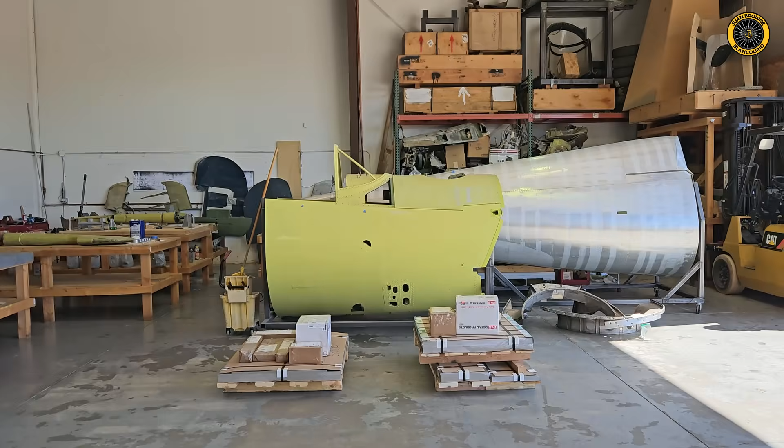We're back here in Cameron Park getting an update at Chuck Wahl's Vulture's Row Aviation on the Corsair build. Not only this rare birdcage Corsair, but several other Corsair restorations are going on simultaneously. Let's check it out. Right now he's working on about 7 different Corsair aircraft here in the shop today.

Well, it's been a while. Let's get an update on Chuck's birdcage Corsair. He's working on this a little bit on his own while the employees are working on restorations for other customers.

We'll start with the R2800 Pratt & Whitney radial engine, the Dash 8 model. This is one of the very early models of the 2800, and apparently the 2800 was first tested in the Corsair. A 2 or 3 stage blower back here.

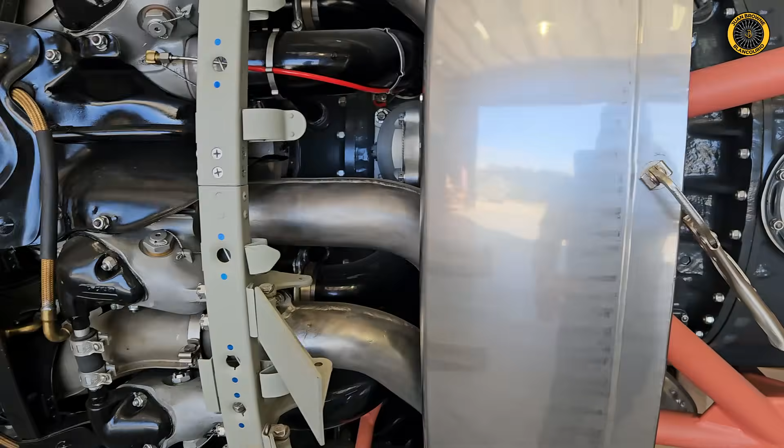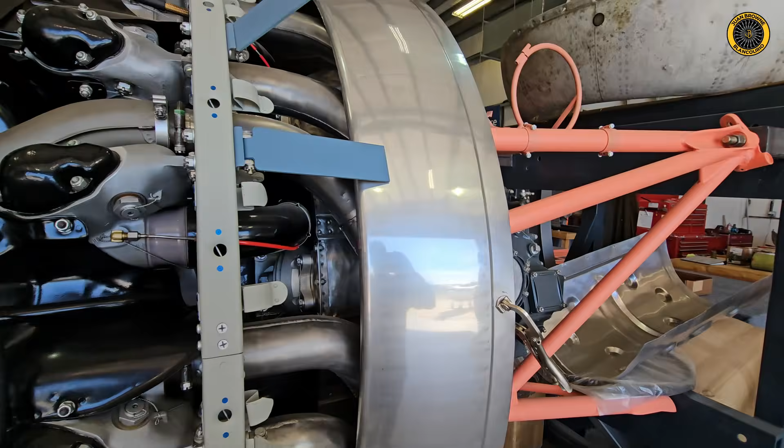Neutral, low, and high. The engine cowlings that we looked at are going to mount here. Cowl flaps are going to mount here. Here's the backside of your exhaust shroud, stainless steel. Fortunately, this is original, and then this piece is hand formed new to create the exhaust shroud.

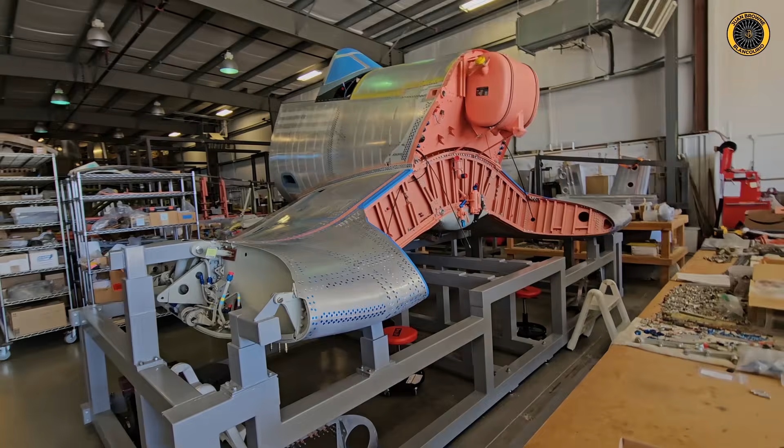Here we're looking at the firewall forward of the birdcage with an original 20-gallon oil tank for the birdcage Corsair. Of course, the brand new center section and spar, and here's where a whole lot of additional plumbing is going to have to take place for both fuel and oil, plus all the coolers and doors and everything else associated with that. Now the fuselage center section has had a lot more work done to it since last time we reported on this.

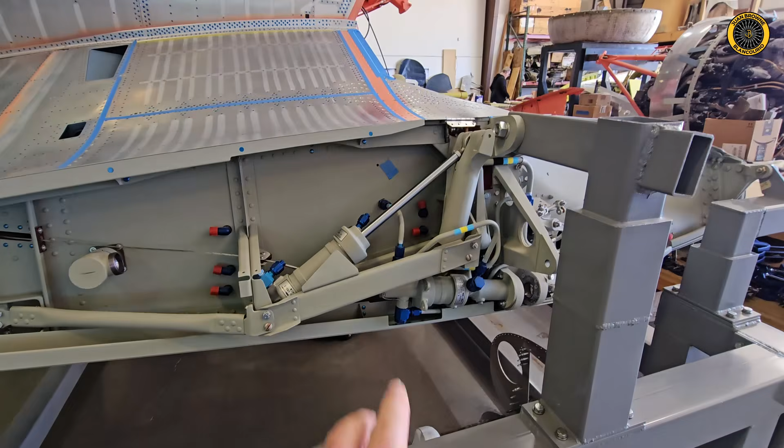He's getting all the plumbing in here for fuel. The fuel is done. Hey, there's that fuel piece we were talking about. And the hydraulics are getting done. And remember, it's going to be, of course, a folding wing hydraulic design. All the flaps have been mounted.

These flaps alone take a couple of years to build, like 22 of these individual flap panels. We'll come back and take a closer look at this here in a moment. But here's the tail section that's going to be bolted on to here.

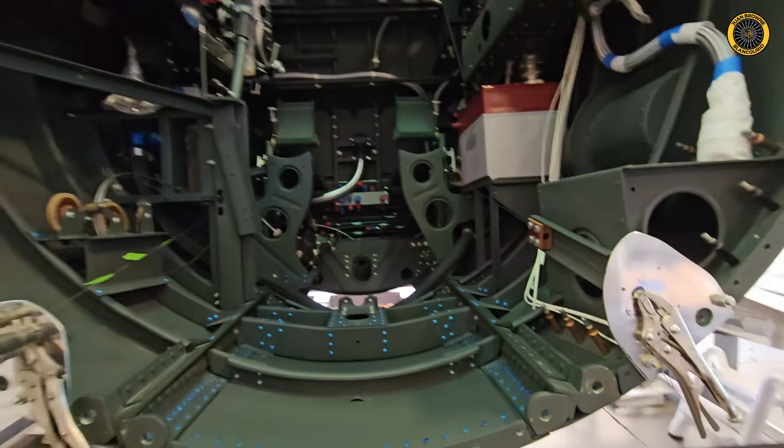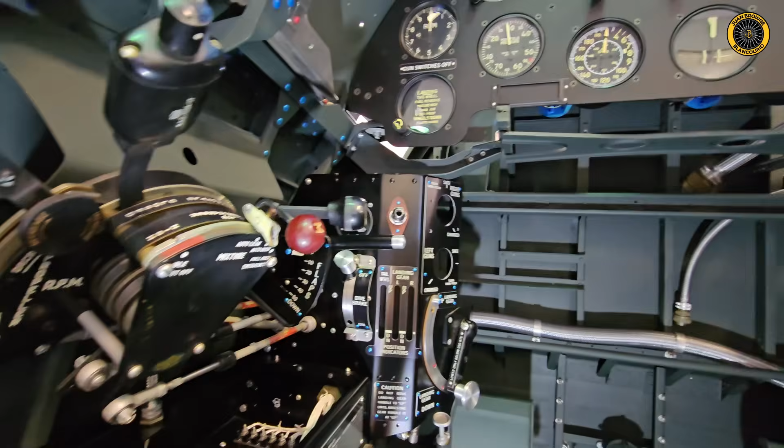Chuck's adding all the detail to the original looking cockpit interior here. There's your instrument panel. A lot of your different crazy controls as part of the Corsair. Looks like landing gear, dive brakes, throttle quadrant, flaps, trims, elevator, rudder, ailerons, bomb release.

What else have we got here? Emergency gear extension. Hydraulic pressure, fuel, amps, G meter, electrical panel here.

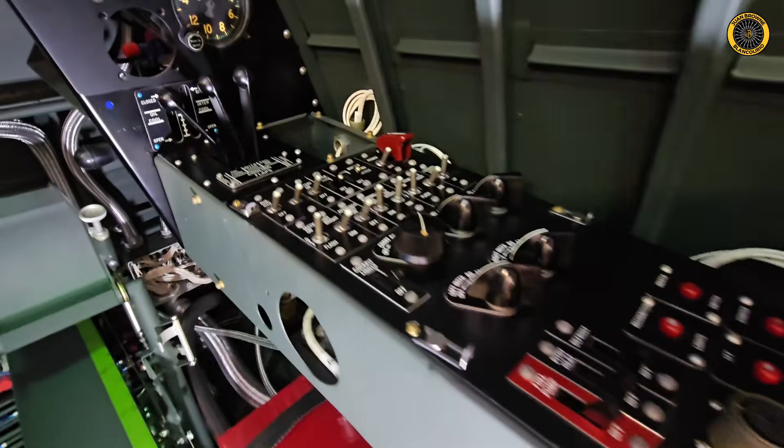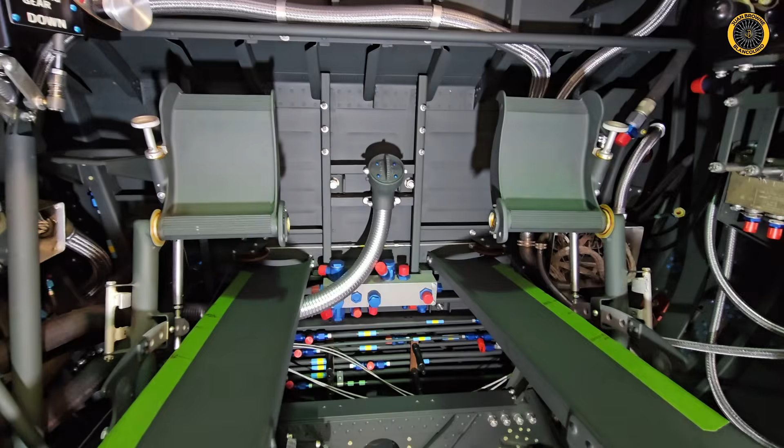All of the details going into this restoration. Of course, the rudder pedals, air vent, and look at the hydraulic lines all properly marked. Here's your fuel selector valve and handle, chain to drive all that. Just an incredible amount of detail.

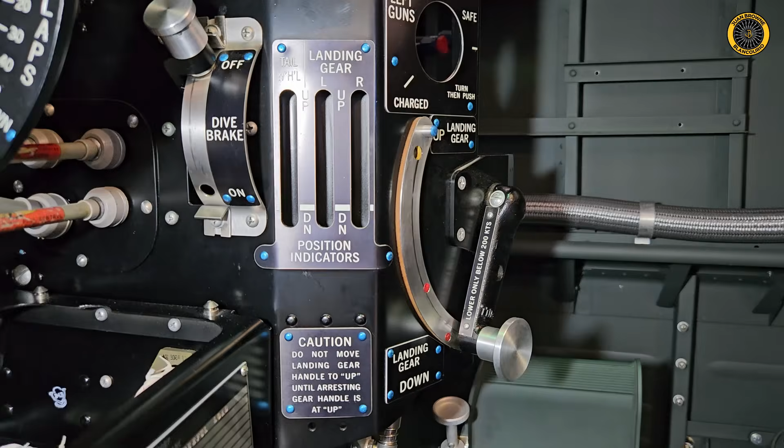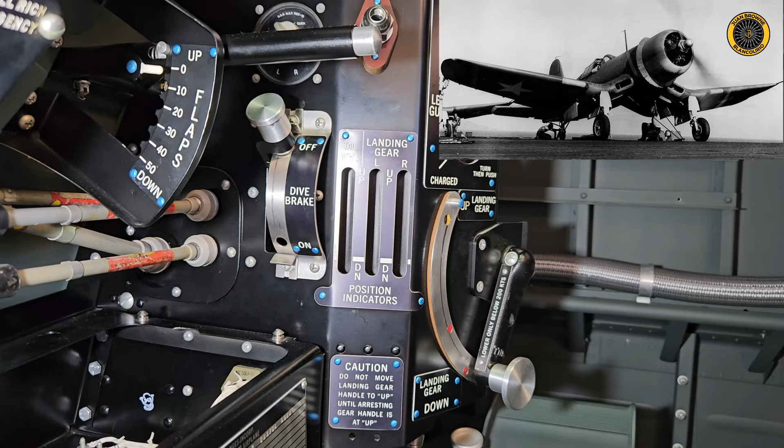Here's a fascinating bit of trivia about the Corsair. You see the landing gear down lever and the placarded 200 knot limit on the landing gear, and then the separate dive brake controls. And we've talked about this before. Remember, on the Corsair, it's the panels on the front of the landing gear legs which are your dive brakes. In other words, your main landing gear are your dive brakes, but there was a limit on the tail wheel, and that's that 200 knot limit on the tail wheel.

So if you need to get out of a scrap in a hurry, or you need to dive bomb as vertically as you can, you would lower the dive brakes, which would extend the main gear only. And when you come into land, of course, you lower the landing gear using the landing gear lever, which lowers the main gear and the tail wheel. So because of that tail wheel speed limit, they had to have a separate dive brake control for the main gear / dive brakes. And check out that airspeed indicator.

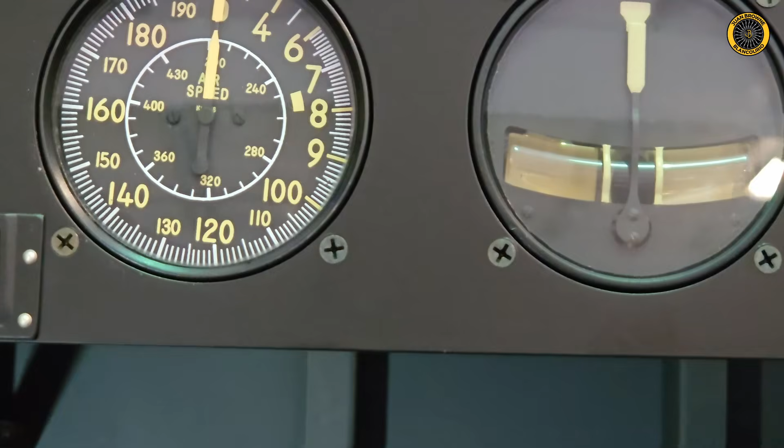It goes twice around in knots. Looks like the first dial winds it up to 200 miles an hour, or correction, 200 knots, and then it wraps all the way up to 430 knots.

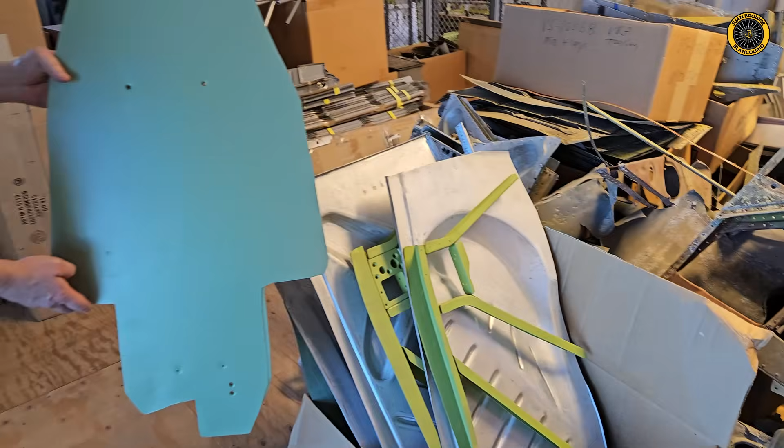Here's the dive brake portion of the landing gear we were talking about. The landing gear would be down here, and this big panel here would be your dive brake, bolted right on to the landing gear, main landing gear leg. And there's some additional gear door parts down there. Dive brakes. Landing gear and wheels, some assembly required.

Now let's get underneath the center section of the Birdcage Corsair into the right-hand landing gear wheel well, and look at the incredible detail going into this. All of the hydraulic lines, fuel lines, electrical cabling, all coming into play now.

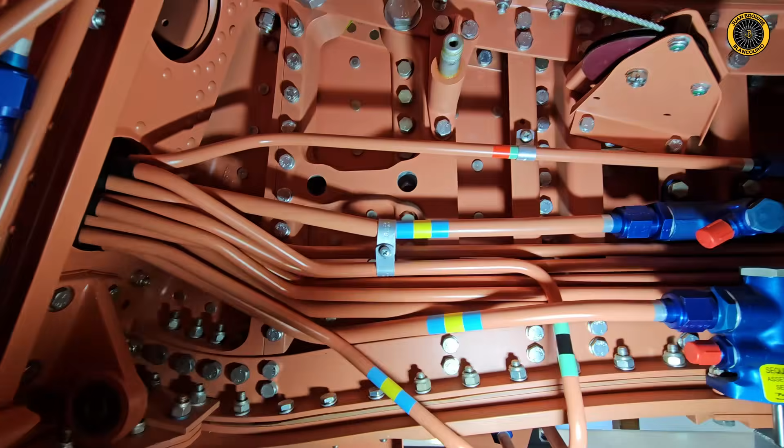See how the hydraulic lines are color-coded? Sequencer valves for the landing gear, and of course your brand new spar running right through there, part of your center section, kind of looking at the back side of it. And look at even down to the wiring with the original markings on the wiring. Just an incredible level of detail.

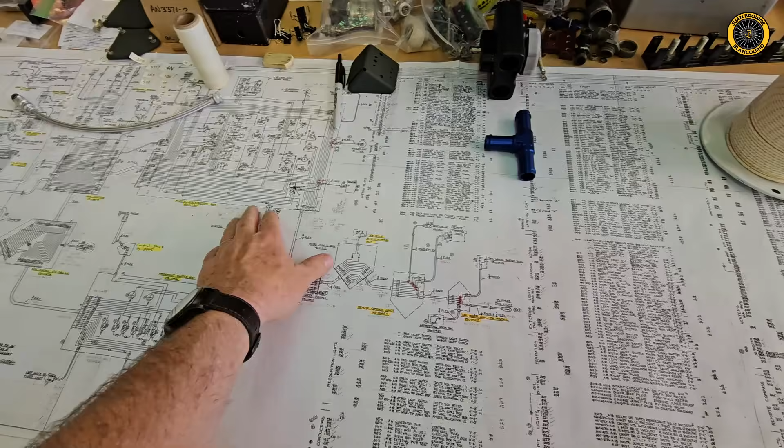We were talking about the wiring down below there. Here's the original wiring, 80-year-old or plus wiring for the Corsair, and here's the new wiring which matches the original, but check out the drawing here. So to get your wiring to match the original schematic so you can troubleshoot it, you got to label each individual wire, and Chance Vought would just put a bit of this tape or this marker at each end, the termination end of each wire, to indicate what number wire it was and where it was on the schematic, as opposed to North American, which would mark the wires every so many inches with a number. So get your magnifying glass out and start wiring your Corsair.

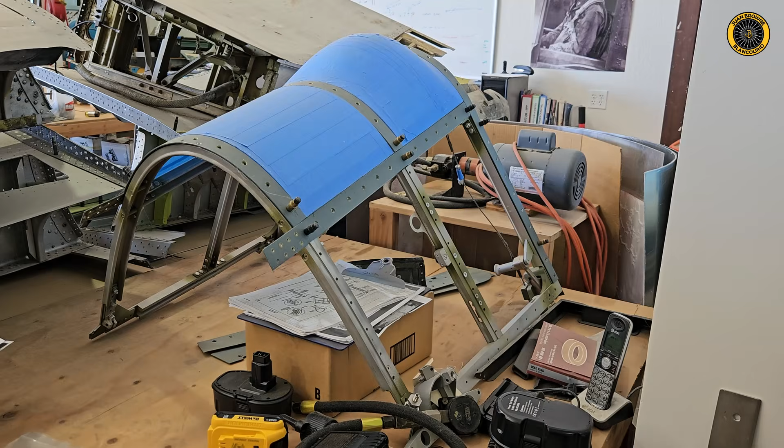And here's the canopy that gives the aircraft the namesake Birdcage Corsair. It's this birdcage style canopy of the early model Corsairs. They give it its name because, of course, later they came up with the big plexiglass bubble canopy for greater visibility. You've got room up on top there for your head, so you can even change your mind.

Now let's go take a look at some of the other projects going on in the shop.

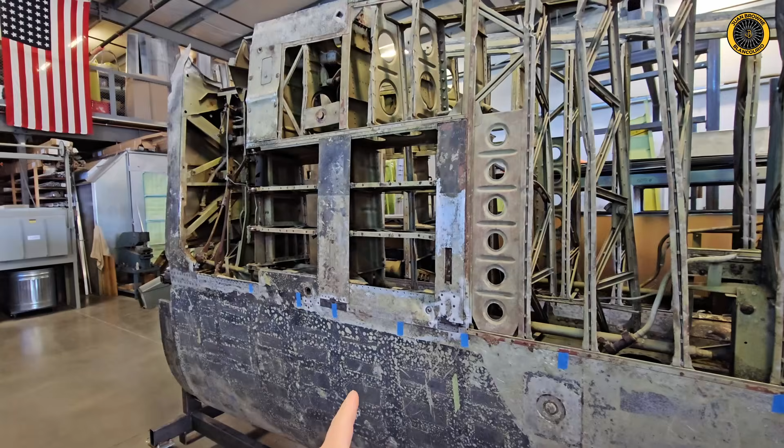Here's a set of wings to be restored fresh from the South Pacific. These are F4U-1 Alphas. As Chuck reminds us, before the 1Ds, these had auxiliary fuel tanks in the wings, and they later went to drop tanks. And remember, part of these wings are fabric covered, and here's the little clips that hold the fabric onto the ribs in lieu of rib stitching.

And these were a whole pile of wings collected out of the South Pacific. So the Corsair out there in the field today, known as Lucky Gallon, these wings are going on Lucky Gallon. I asked Chuck what happened to the wings of Lucky Gallon. Lucky Gallon was the famous racing airplane from back in the Cleveland Air Races, and it was abandoned basically, and the wings were missing. Somebody took off with the wings, so in order to restore the Lucky Gallon, they got to get these wings set up for it.

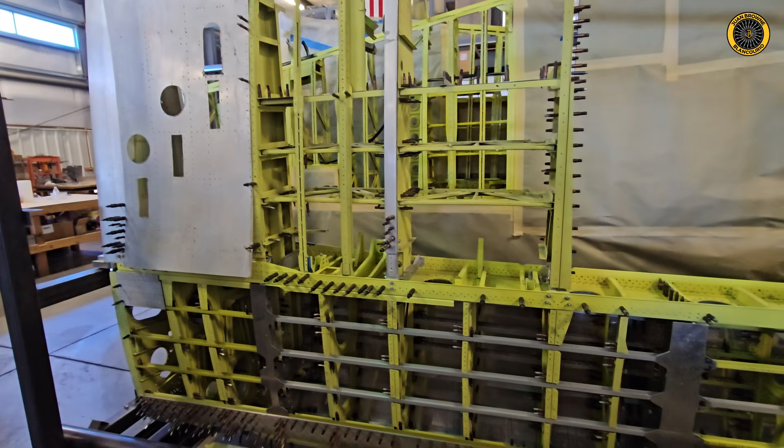Here's a set of wings to a 1D Corsair that are being restored. You can tell the original parts that are chromated and have the original rivet holes in them, and then the new parts going in have not yet been drilled. So parts like this, brand new skins, and a lot of Clecos. Of course, the Clecos is what fastens the parts together temporarily until you get it riveted together.

And here's how you start this whole process. You get the original blueprints by hook or by crook from the Smithsonian or wherever, but you got to start with these original blueprints and then start working from there. And then you get an existing Corsair wing and you build a jig to match that wing. You get one good straight wing, jig that wing, and now you can recreate additional wings from that one good jig, or recreate that jig multiple times over. Same thing with the fuselage and the fuselage jig. But it all starts with a good set of drawings.

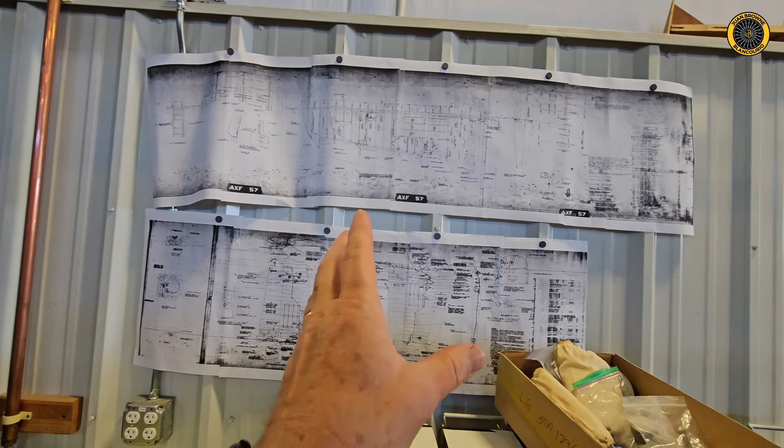Now, it's wartime, and when they're printing these prints up, everything's moving really fast. There's a lot of errors and mistakes on these prints. So in order to do the kind of work they're doing here today, they really need to have an original aircraft, a completed aircraft, and compare the completed aircraft to the notes on the drawings. There is a lot of errors in the wartime drawings. Probably a lot of young kids right out of school, like my dad, working on that too.

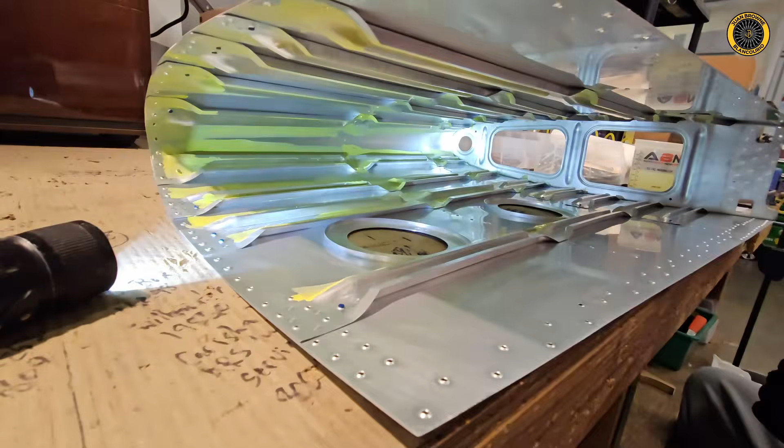Some parts in the paint booth here. It looks like zinc chromate, but it's really epoxy primer. And is that what's getting hand brushed on here too? Yeah, he's brushing on the back side where the spray gun won't go. Oh yeah, got it before it. He sprays everything. Painstaking details.

So here you'll see a combination of yellow epoxy and traditional dark green zinc chromate epoxy. Well, when you open up the ammo cans, you want to see the traditional dark zinc chromate colored epoxy primer in your restoration.

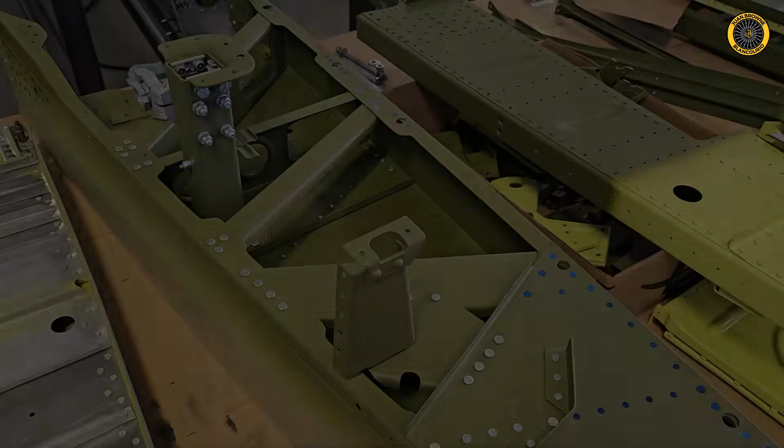Some of the things you find in an old Corsair.

Oh, something happened there.

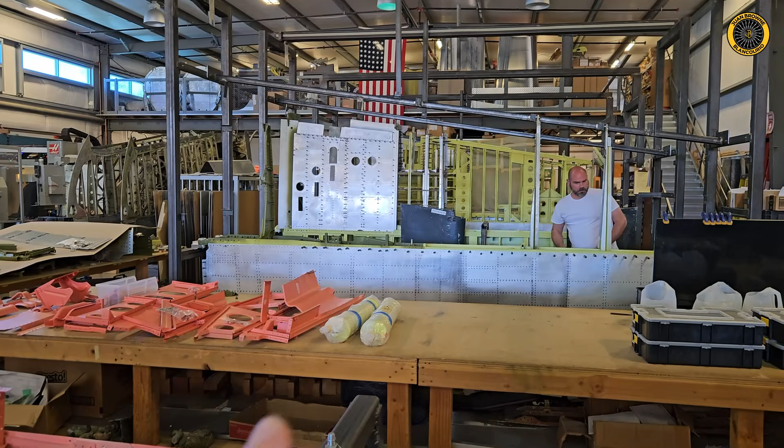Now you see a change in color from the traditional zinc chromate color to this salmon colored primer. When you get into the salmon colored primer, you know you're working with a birdcage Corsair, a really early model. This was the color of the primer for those model of aircraft.

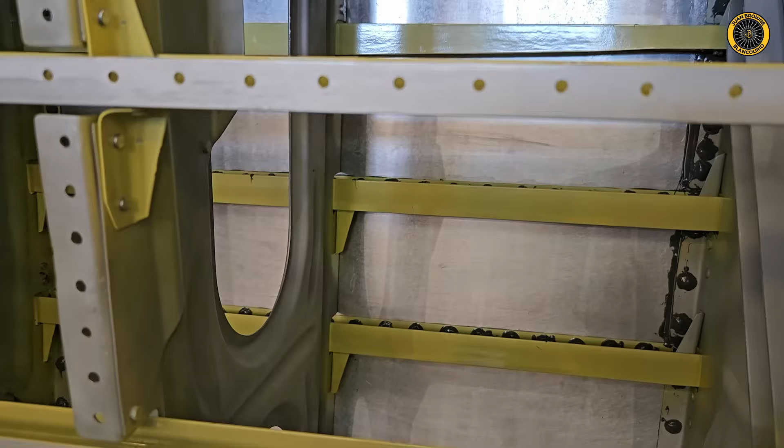The early model Corsairs used wing tanks, or wet wings, and this is the inside of a wet wing of a birdcage Corsair. If you've ever built an RV aircraft before and built your own fuel tanks, you'll be familiar with this Pro Seal.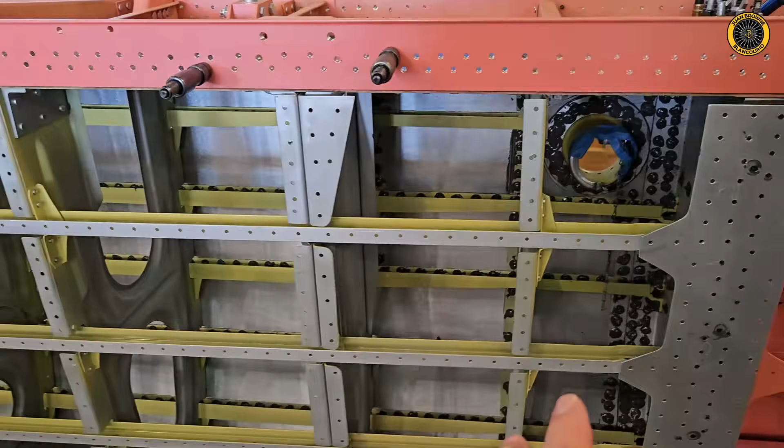You got to rivet each rivet wet with Pro Seal, and that stuff gets all over everything. So the inside of this part of the wing will be filled with about 58 gallons of fuel.

Later model Corsairs, after the 1 Alphas I believe, they began to go to the drop tanks. So they got rid of this complicated wet wing design and just went with the drop tanks.

And each Corsair had a fuselage tank in between the engine and the cockpit.

Because the birdcage Corsair is so rare, a lot of these parts are all brand new manufactured, including these wing spar assemblies.

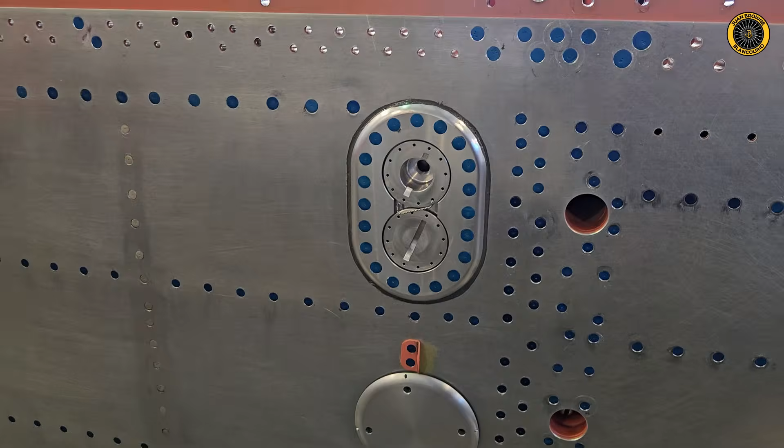Here's the drain sump for a wet wing Corsair on the bottom of the wing, and underneath here is your fuel filler on the top of the wing.

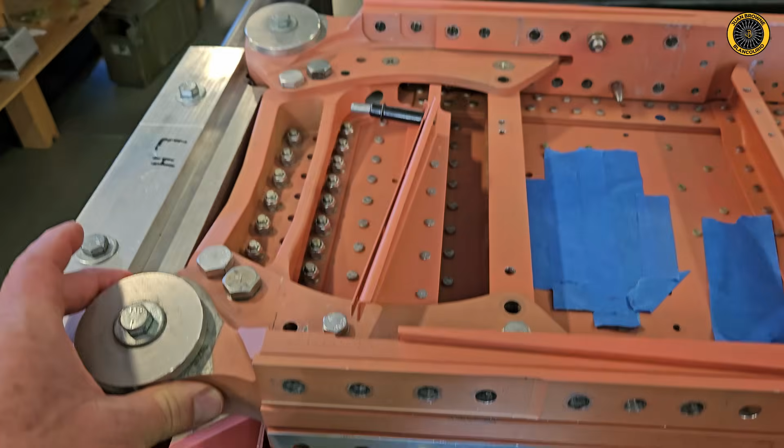And of course the wings on the Corsair fold, so you've got these crazy angles here to create the pivoting outboard portion of the wing.

These are just the bolts that hold it into the wing jig for now. And these brackets here are going to hold the ammo boxes, so you're going to access your ammo bay right here, and that's going to be the top wing skin.

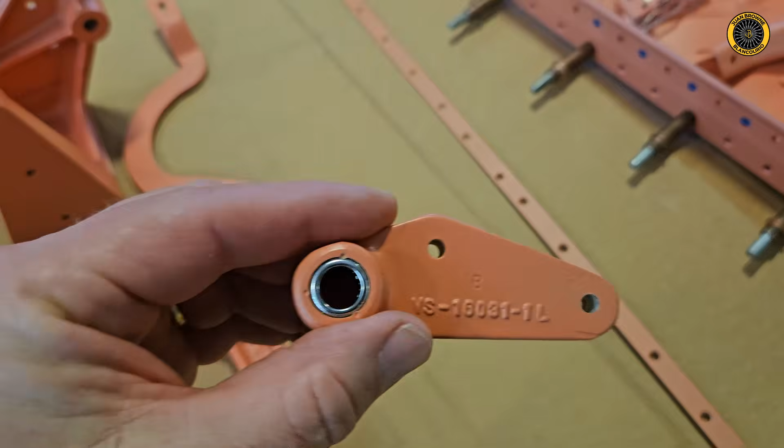A lot of the millions of little brackets and bits are original with the part numbers on there, restored, but a lot of parts you got to make brand new, like these fuel parts here, because the original parts are just not airworthy.

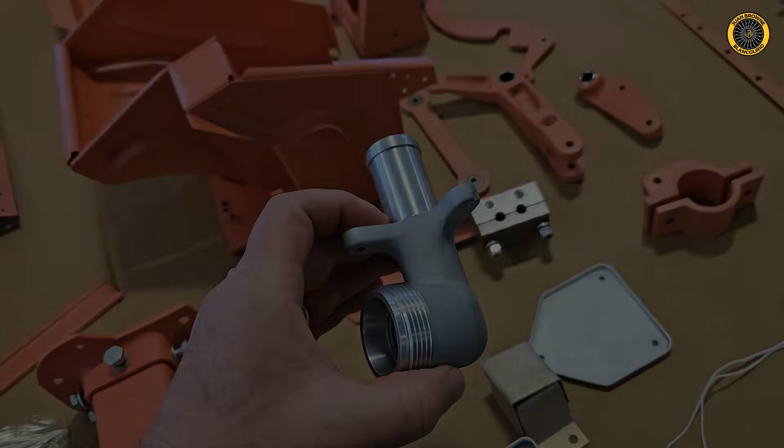Look at this, here's some ammo boxes, and here's some gun barrel blast tubes where the 50 cals would stick out of here. Augmenter tubes for your guns.

This is an accessory cowl door. It kind of works in conjunction with the cowl flap, showing Kellen how that thing drops down. When you shut the engine down, that opens up and helps get cooling air through the aircraft.

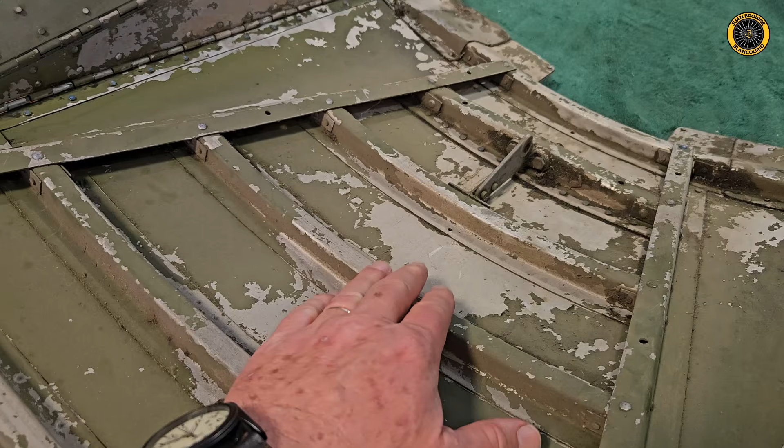But anyways, this is an original part, and from this original part they're going to get the specs. They're going to basically take this thing all apart, get all the dimensions, and put it into SolidWorks.

Then they begin to recreate additional new components for this particular part, so they can build a number of these components, but they got to start with an original piece.

Back that up with the drawings and then feed it into SolidWorks and start spitting out new parts from there, because each one of these is different, and of course it's all got to be spot welded.

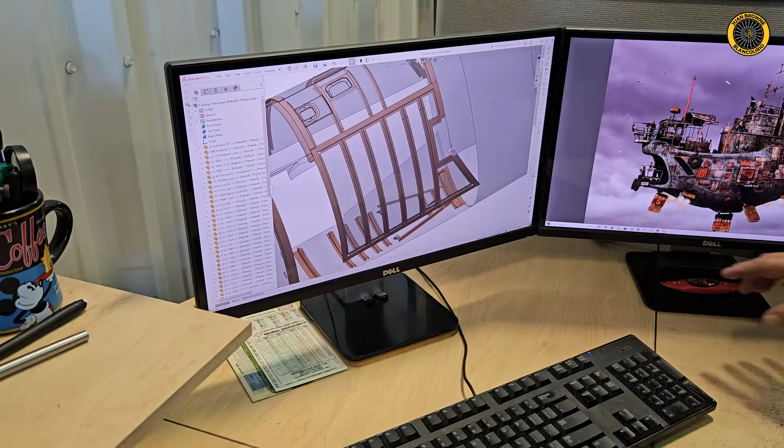So here we are in SolidWorks, and here's what the component looks like when you begin drawing it up. From this, you can begin to build parts with it once you've got the drawings completed.

So here's an individual part off of SolidWorks that he's drawn up. It's going to go into SurfCam, and from SurfCam it creates the code to feed the CNC machine, which can then create the dies, which you can then begin to stamp out the parts from.

Oh okay, there goes the process of stamping your part. Right there, so you've got the male and female mold.

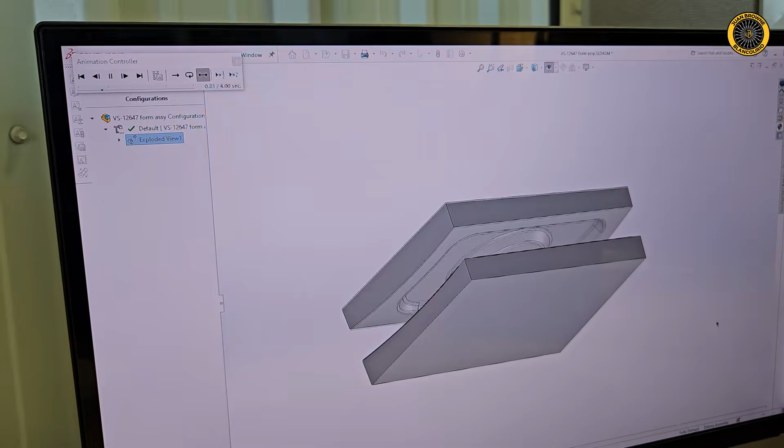And you're machining these molds out of aluminum billet? Yeah, we're not doing hundreds of parts, so it holds up enough for what we're doing.

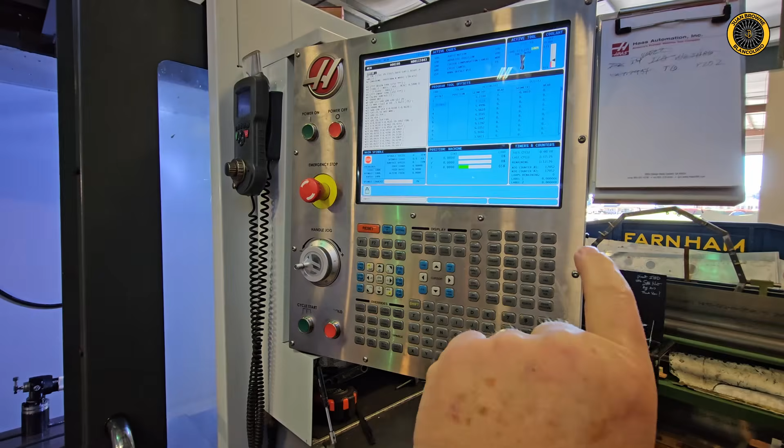Good. And here's your 4-axis CNC machine. You plug the data from your drawings into here, and you can start milling them out by the hundreds.

So as you remember, the Corsair had 50 caliber guns per side, 1,175 rounds, and these are the chutes that fed those rounds. Okay, here's some brand new stainless steel ammo feed chutes feeding the ammo.

They had to start with an original piece, and we're going to show you the jig here in a second.

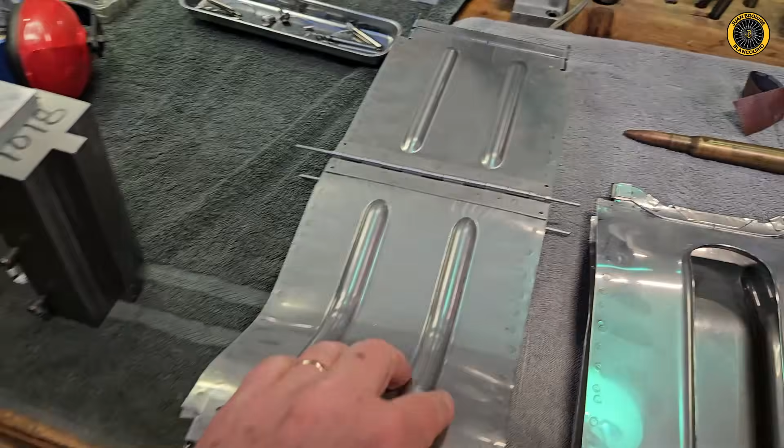So how do you get these shapes? You come over here and you have to build a jig, and if you pop it open, there's the shape that you're looking to achieve right there.

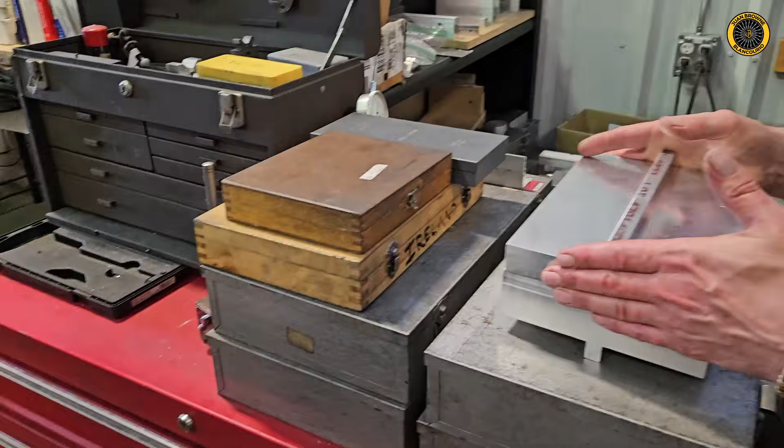Put that in a hydraulic press, smash it down with a few thousand pounds, and you've got your stainless steel part here that is then subsequently spot welded together.

Ammo chutes, stainless steel.

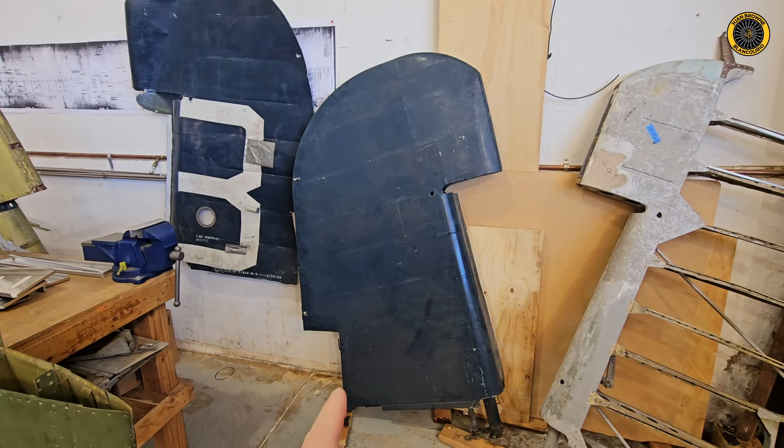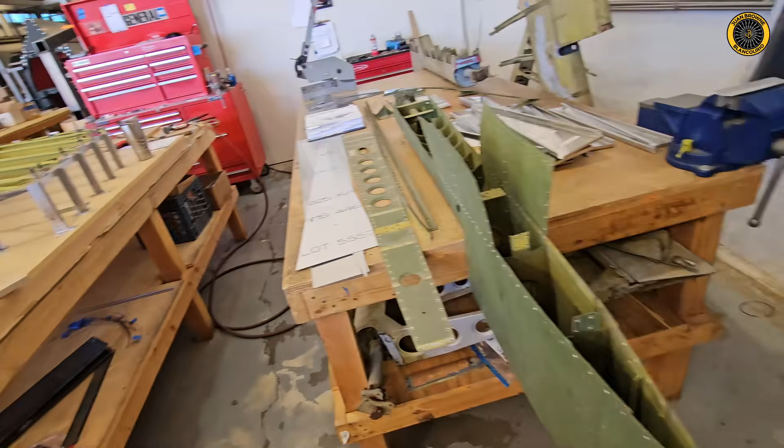A lot of the parts on the Corsair were fabric covered. Here's the rudder department, and here's an original rudder. Here's the fabric removed from a rudder that's getting restored, and over here is the rudder rebuilding center. You've got a lot of original parts in here, and a lot of new parts that need to be made. You've got your rudder jig holding it in position, but a lot of these ribs need to be built from new.

So again, you start with that dead soft aluminum, and you hand form the angles of this rib over a wood block. Now the early model Corsairs had the lightning holes, and then the later model Corsairs went with these stiffener dimples. We'll go show you how they make these dimples in the ribs next.

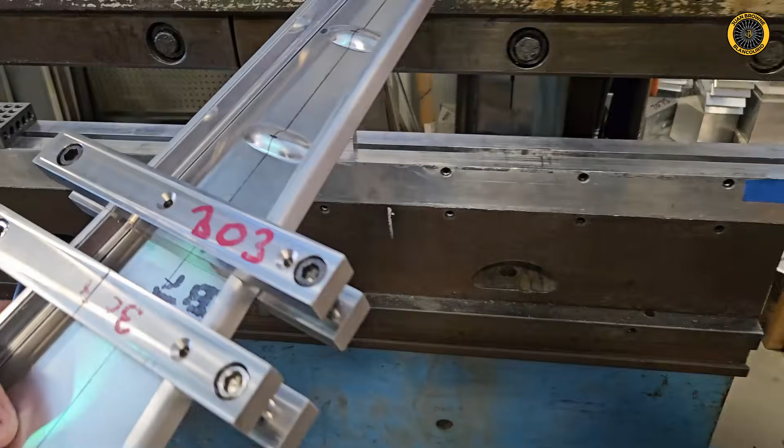So here we're going to make some rudder ribs out of 2024 dead soft O aluminum, 032 gauge. He's got his dies here, and he's going to press these dimples into the ribs like this. There's the die that went through the whole SolidWorks process to get created. Probably an original press from back in the day. So dead soft aluminum means it's very malleable at this point.

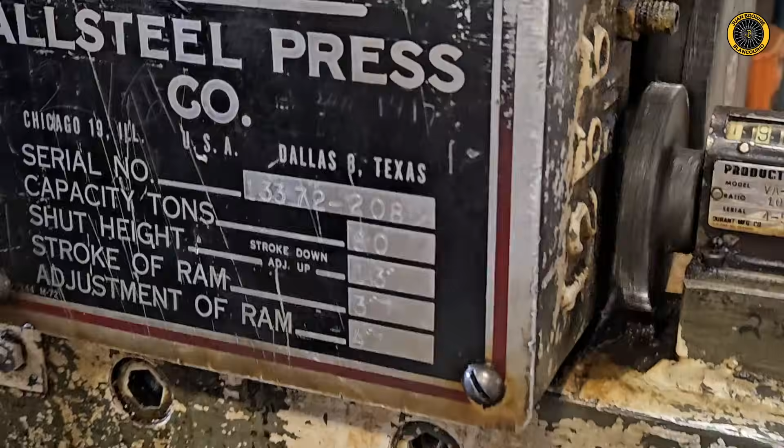Get it right on the money. Okay, now. He's got his marks lined up right there. And this, what is this telling us? The amount of pressure you're putting on it? No, it tells me how far I'm going. How far down? Yeah. All right, I've mapped out where my uppermost limit is and my lowermost limit is.

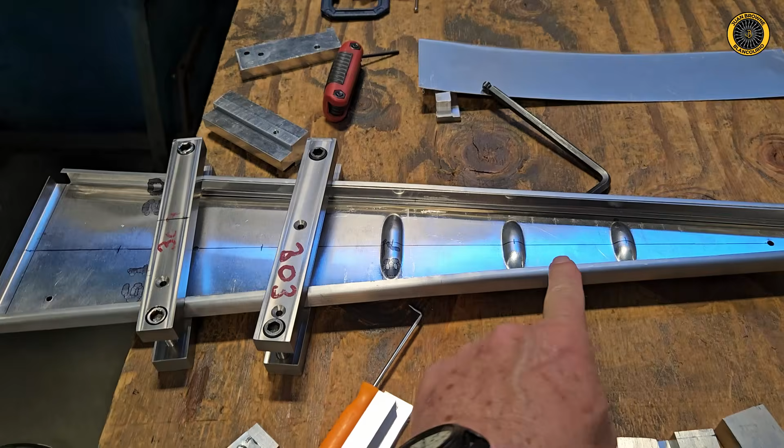Got it. And here's the original spec from the blueprints, giving you the spacing and the size of these dimples. And there's your finished stiffeners. It stiffens up the part, and it's made out of these molds right here.

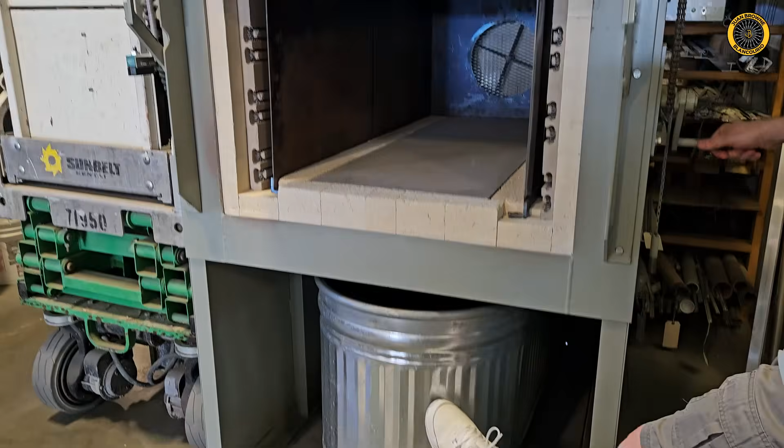So that dead soft O aluminum needs to be brought up to spec of T4 hardened aluminum through this heating process. You take your O aluminum, and to harden it, you've got to heat treat it with your Lucifer oven after you've gotten done shaping it to the form you want. 920 degrees, anywhere from 20 minutes up to an hour depending on the thickness of the metal. Then when it comes out, it has to quench in a quench tank immediately to get the hardness.

So today we're going to do a little spot welding review on this vertical fin to an F4U Corsair, a Dash 4 Corsair, one of the survivors from the Soccer War Corsair collection. Remember the war in Honduras and El Salvador where they got those Corsairs out of there, and I believe those were also in Baa Baa Black Sheep?

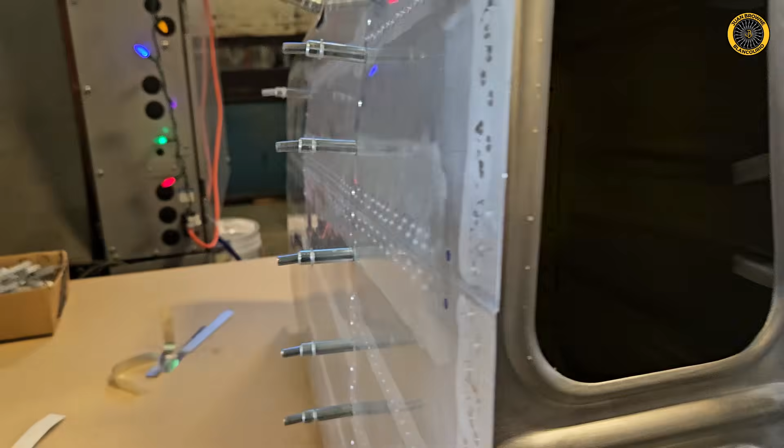Maybe, I think so. Anyways, spot welding. All of these little bits here are going to be spot welded. They're only going to use flush rivets on the ribs. These are original ribs, and a lot of the rest of these parts are remanufactured, and of course all new skin.

In order to do this spot welding, we're going to use the big machine here. Let me see if I got my glasses on. 21,000 amps for 55 milliseconds. You'll hear a little buzz through the metal, and that's your spot weld.

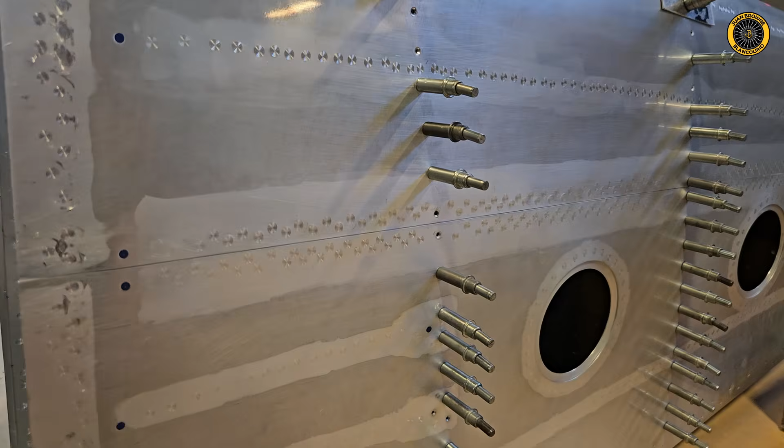Now that amperage and the time changes each day, so you've got to do a test spot weld before you actually go to work on the actual piece, because if you get it wrong, you're going to blow a hole through it and ruin the entire priceless part. Though you change the amperage and duration, the spacing of the spot welds is always the same, right off the spec, off the blueprints. Very tight spacing.

By the way, Chuck's electricity bill is about $2,500 a month running these machines. And so far to count, he's done 157,000 spot welds, because a lot of the Corsair is spot welded.

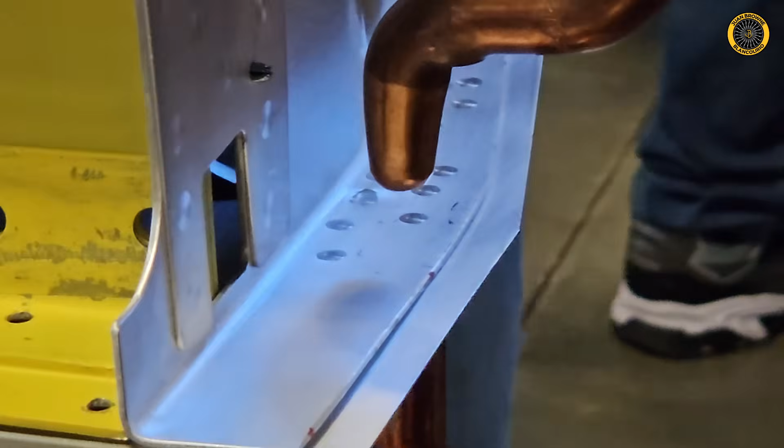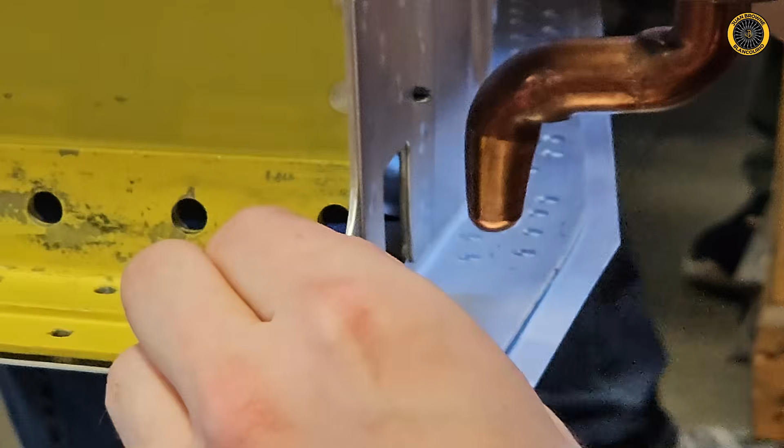And the spot weld makes a perfectly flush joint. It's flush on both sides. And as far as the spacing goes, at this point you're basically just eyeballing it.

Well, that little part right there, there's actually a couple pieces stacked. So I was putting them there trying to avoid the edge of the piece, because if you hit the edge of the third layer trapped in the middle, it'll blow material out the side and you won't get a good weld. Now though, I'm down to just two, so what I'm going to do is go to the end here, have one on either end, and then just start putting them in the middle until I get the spacing that I want. Okay, lift it up a little bit there, Lou.

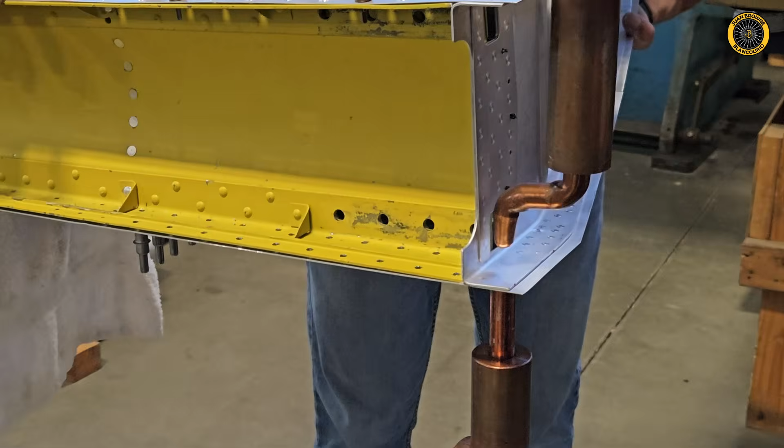Now he's going to work his spacing on the field in between where he left off and the end of the rudder, or vertical fin. You can just barely hear a little high frequency buzz or whine each time he hits the spot weld.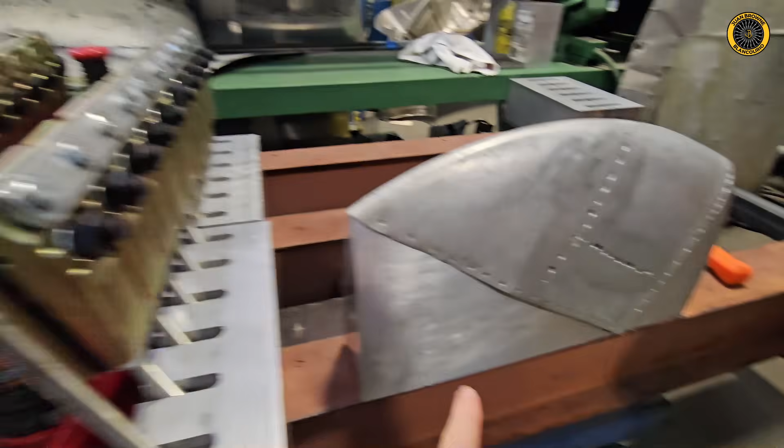Lots of round parts in the Corsair that need to be formed. So here's the form that you eventually want the part to fit, and here's the stretch blocks that's going to help you create this part. So you take your mold, set it on the jacks, grab a hold of the sides of the aluminum skin, and then press the block up into the aluminum and begin to form this shape.

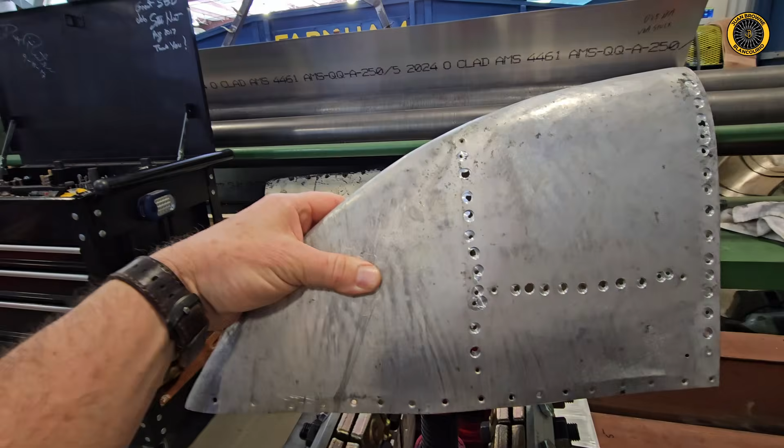And it's going to require some additional persuasion here with a hammer and a shot bag to get that perfect fit.

Here's another example of rare and exotic parts. Here's a piece of the cowling that goes over the cylinder, one of the only original cowling pieces in existence. So from this, they're going to get all the dimensions to create new ones.

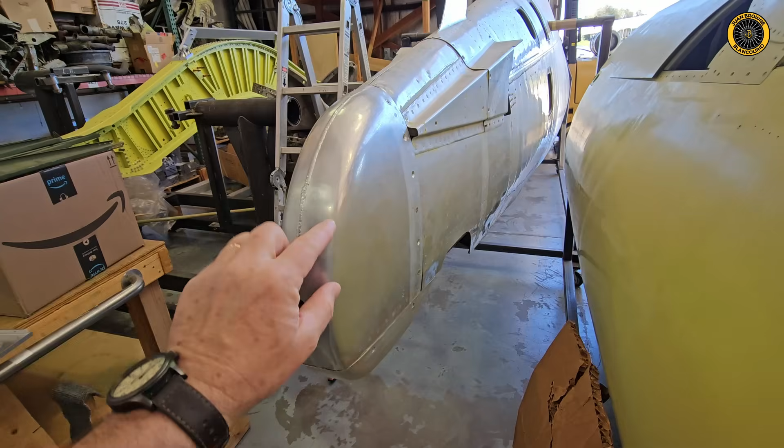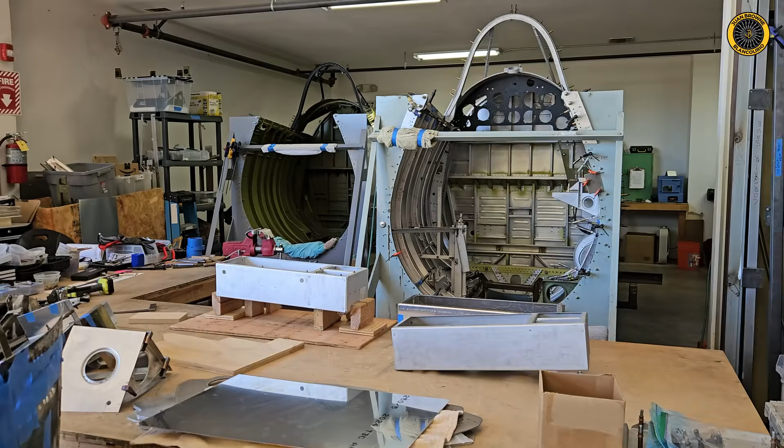Here's the fuselage center section department. Here's Lucky Gallon's original skins, which have been drilled off and got the dimensions of. And then here you can see new skins, new ribs, original parts, as they got this kind of frosted colors.

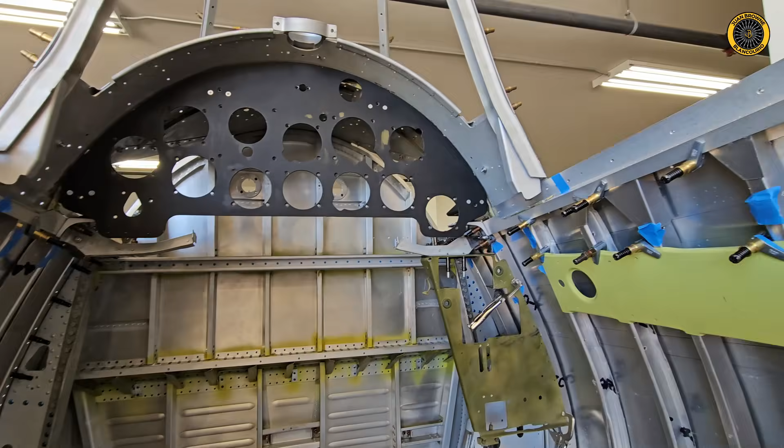They've been blasted. So there you can see kind of the blend of new and original parts going into a fuselage center section. Of course, this will be the cockpit area right here.

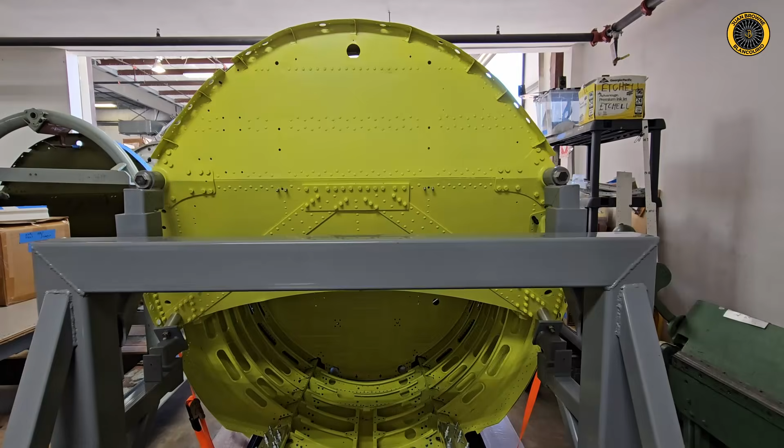And here's where you can see it's jigged up, ready for the engine mount. And right here and here is where the gull wing spar is going to bolt onto, or the fuselage bolts onto the spar. Here's a brand new wing spar center section, the bent wing bird.

And there's the salmon colored one for the bird cage over there. And if you've ever owned an old airplane, it's often the corrosion in the spars which ends up killing the airplane or the airframe. So here you can get a brand new one built from scratch.

Here's a great example of the level of detail that goes into one of these restorations. These are the gun doors, the doors over the top of the wing to access the guns. These doors come in 3 parts.

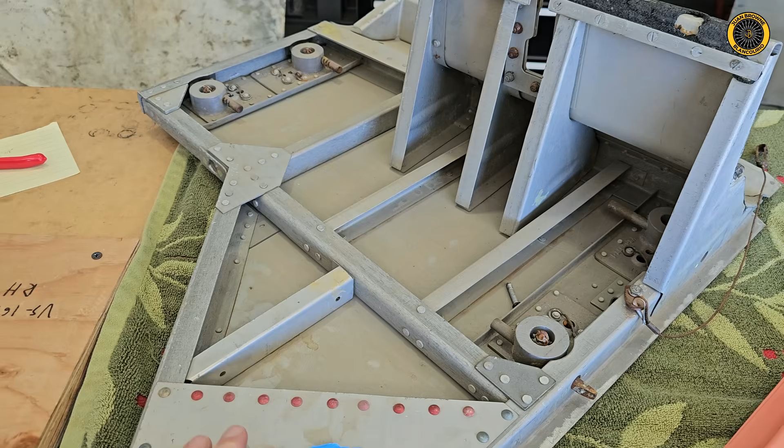Here's an original one, a very rare original one. Here is a new one that has been recreated. And so you've got this complicated latch and lever assembly.

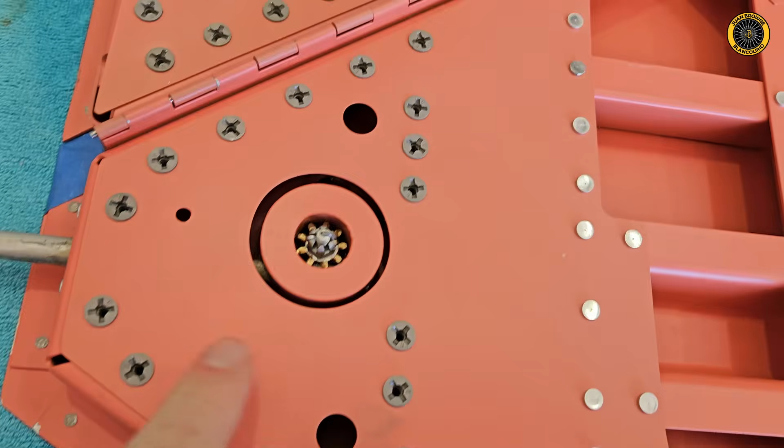Here's a good example here that latches these kind of like an aircraft door. So you got to undo that Dzus fastener there, and then flip that handle up, and now you can turn the handle and open or close the pin that opens and closes the door.

And since this is the salmon color, this is the bird cage color, and on the bird cage they've got these very unique fasteners early on, lock screw fasteners, threaded like a riv nut into here. Later model ones, they went in with the explosive rivets used right in here.

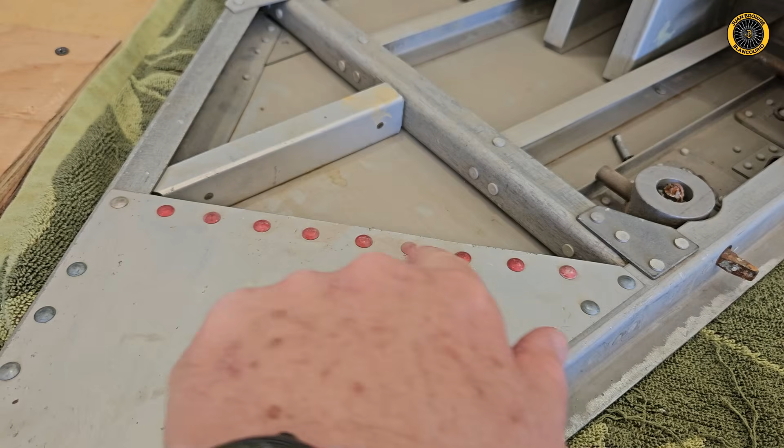Gun doors, multiple latches. Here's a latch that latches in 1, 2, 3, 4 places. Stainless steel, using that latch right there.

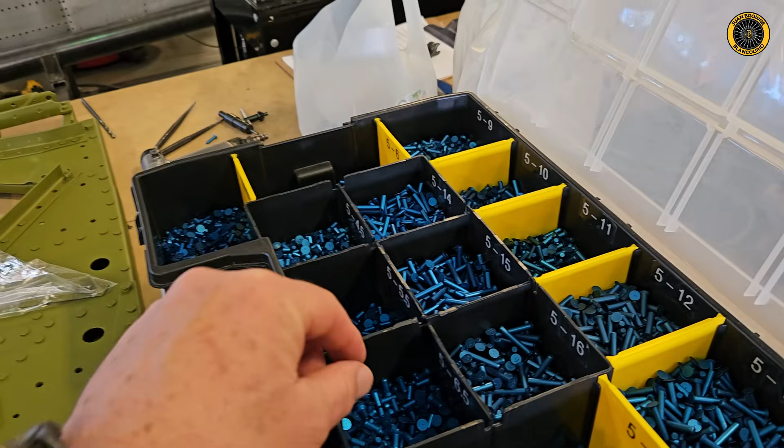One of the common questions is, why are the rivets blue? Well, Vought wanted maximum corrosion protection, so they had their rivets blue anodized.

And if you have any questions, you can always reference the easy to follow instructions.